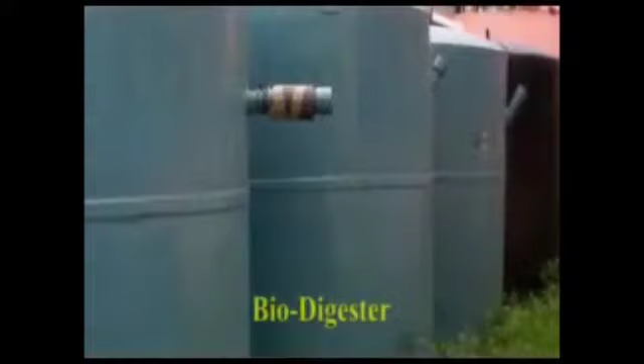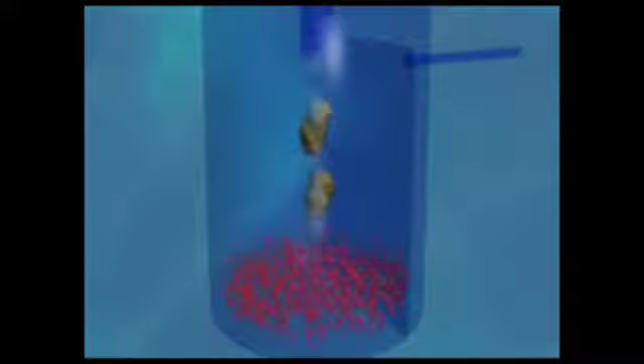DRDO, Defense Research and Development Organization: one of its many breakthrough technologies which have proved to be a revolution in the field of sanitation is biodigesters. Biodigester made of FRP or mild steel is equipped with an inlet pipe for human waste. The inoculum of anaerobic bacteria helps convert the solid waste into biogas that is let off into the atmosphere, and liquid effluent which can be drained off onto any surface and used for irrigation.

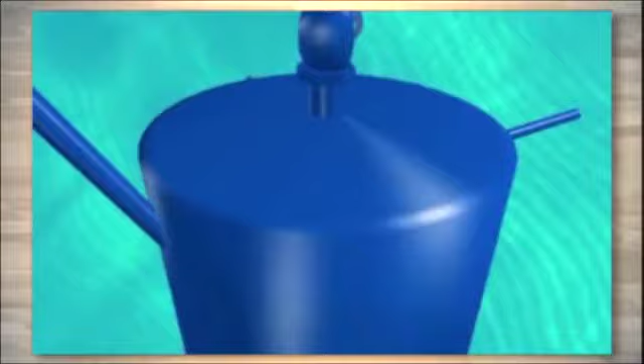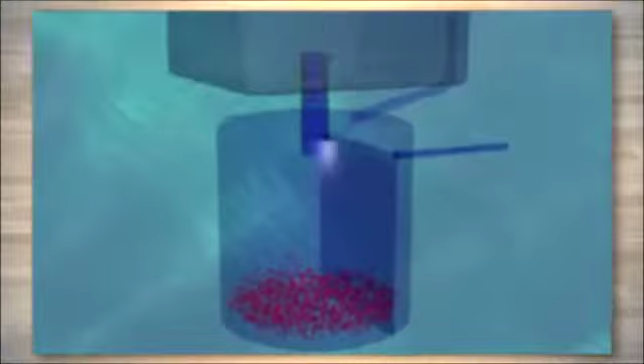This eco-friendly technology has several advantages over aerobic treatments, such as no requirement of external energy, needs low nutrient, can withstand high loading rate with very low sludge generation. Biodigesters are cylindrical or rectangular structures made up of mild steel or fiber or cement and brick construction with the provision of inlet of human waste and outlets for effluent and biogas. Fermentation tank is made of metal, FRP, and has the provision of immobilizing the bacteria in large numbers.

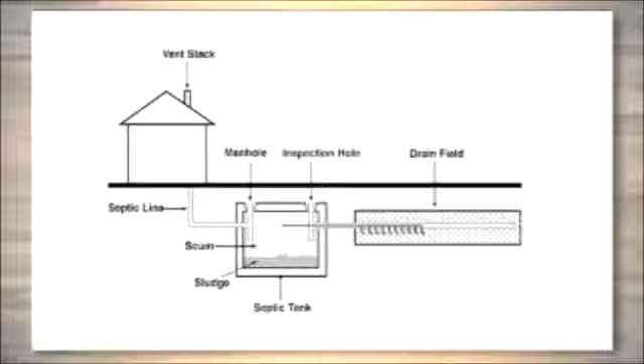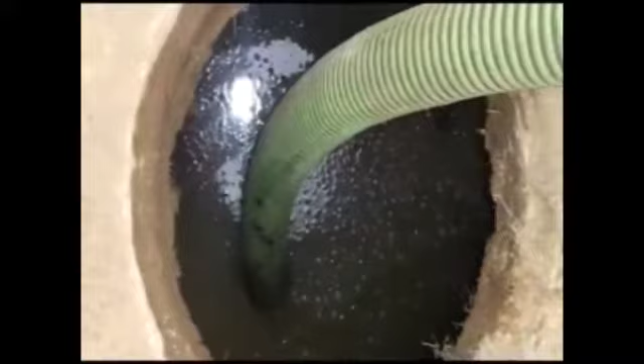Other methods used to treat human waste, such as soak pit or septic tanks, are not successful enough and need regular maintenance. Septic tank is the most acceptable technology for wastewater management where sewage systems are not available. Size of a septic tank for a small family varies from 4 to 10 cubic meters. And large volume tanks are preferred to obviate frequent cleaning of the tank. This amounts to higher initial cost and space requirements, besides the foul smell of the effluent. P-trap is provided in the toilet to prevent foul smell of the septic tank in the toilet seat.

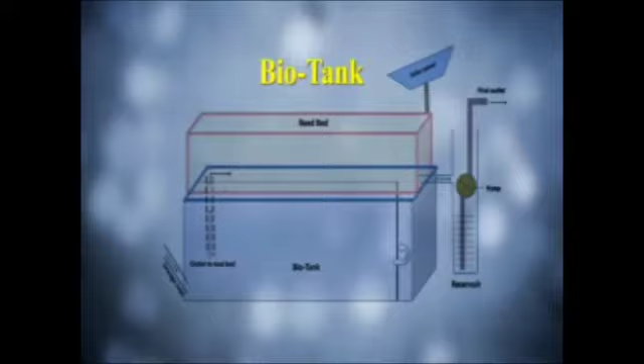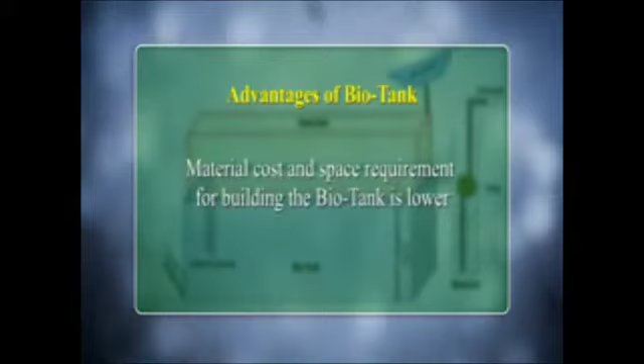To overcome the problems of conventional septic tank, DRDO has developed BioTank. The BioTank has several advantages over the conventional septic tank system. The size of the BioTank is approximately 1/3 of conventional septic tank, and hence material cost and space requirement for building the tank is lower.

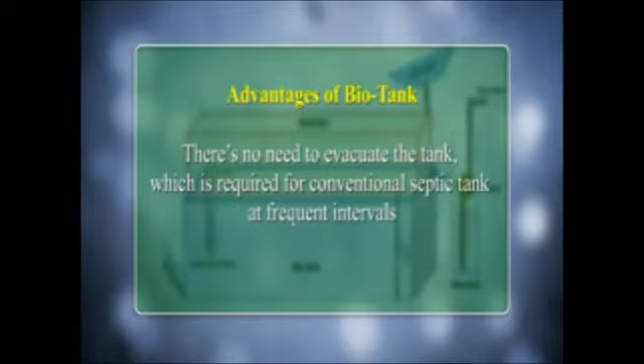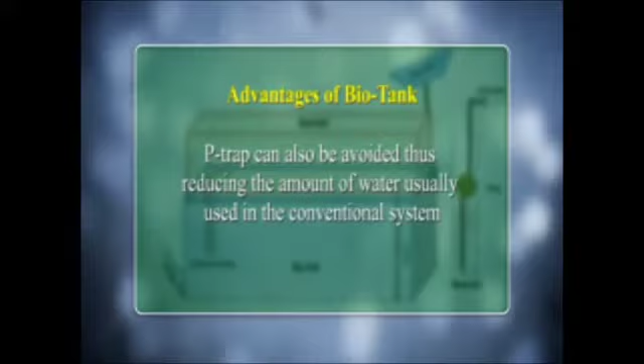There is no need to evacuate the tank, which is required for conventional septic tanks at frequent intervals. This tank requires no maintenance and very little quantity of H2S is produced as compared to a septic tank. P-trap can also be avoided, thus reducing the amount of water usually used in the conventional system.

The biotank resembles a trench dug in the ground to about 1 to 2 meters depth and connected to sewage through an inlet pipe. A trench of size 1 cubic meter is sufficient to handle waste matter generated by 4 to 10 people.

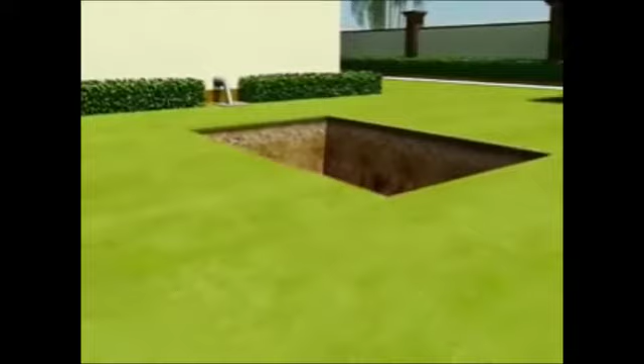The inner walls of the biotank are of cement or brick with a thickness of about 9 to 10 inches. Another wall of about 5 inches thickness is present in the center of the biotank.

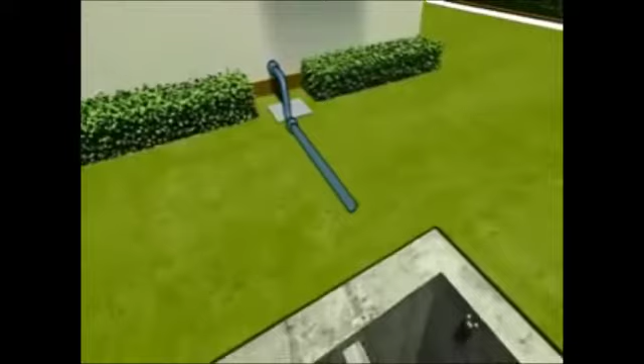An inlet pipe for the waste is present that connects the toilet to the tank. Its other end is 20 centimeters above the base of the tank. The outlet pipe for carrying the effluent is placed on the other side.

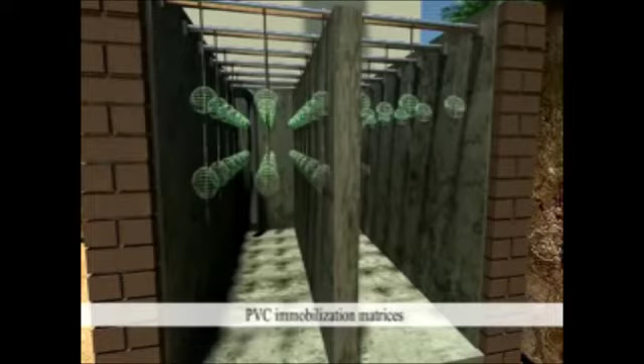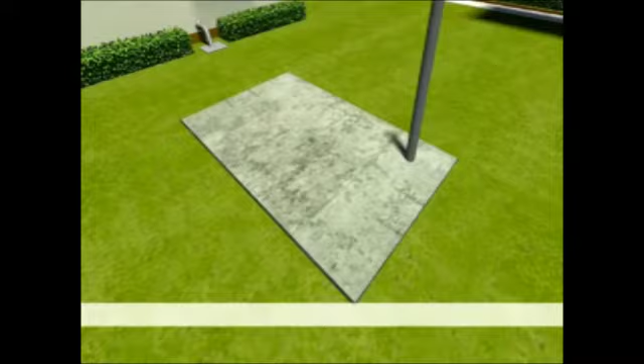Above the center wall rest several aluminium and metal rods running parallel, and suspended from these rods are the PVC immobilization matrices that act as bacterial reservoirs, entrapping the bacteria after the first seed inoculum is introduced. The first seed inoculum of anaerobic bacteria is now introduced into the tank.

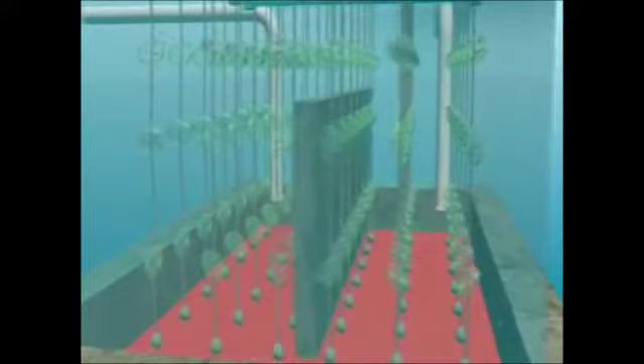These matrices act as the bacterial attachment sites within the tank and ensure the bacterial population in the biotank is always maintained at the optimum level despite changes in pH and excessive flushing. Routine and popular toilet cleaning agents can also be employed without affecting the bacterial population.

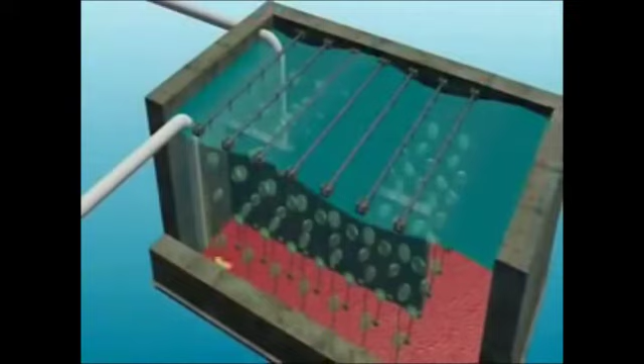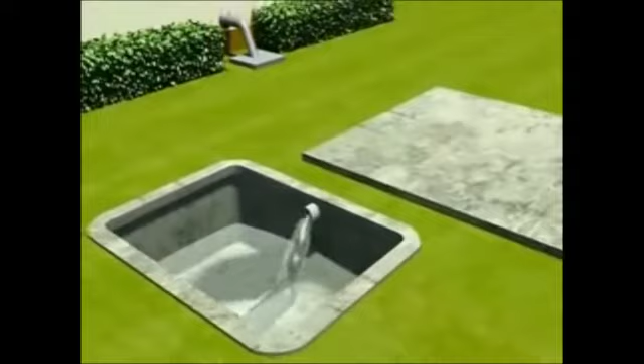Sewage enters the biotank through the inlet pipe. It then passes over the consortium of anaerobic bacteria that break it down into gas and effluent. The treated effluent comes out through the outlet pipe and can be used as such for gardening purposes or can be treated further by passing it over the reed bed system. Biodigesters have an edge over other methods because of the following properties.

It is very effective and eco-friendly, causes no groundwater pollution, no electrical power or chemical is required, 100% conversion of human waste into water and gas, that is, carbon dioxide and methane. It is odor-free. Pathogen reduction up to 99%. No sedimentation, hence no evacuation required for lifetime.

Manual scavenging is totally eliminated by this process. No need of conventional sewage system. It is affordable and maintenance-free. Water can be used for gardening and gas for heating purposes. Requires one-time bacteria charging. Organic waste reduction up to 99%. Suitable for any geoclimatic condition. Bacteria can withstand toilet cleaning agents.

Biodigesters can be easily customized with respect to geographical conditions, number of users, mobile or stationary applications, and the economic condition of the user. Apart from this, low-cost single-house biodigesters have also been designed for the rural sector of the country, which are long-lasting, require little space, generate environment-friendly, safe effluent, and do not require any maintenance.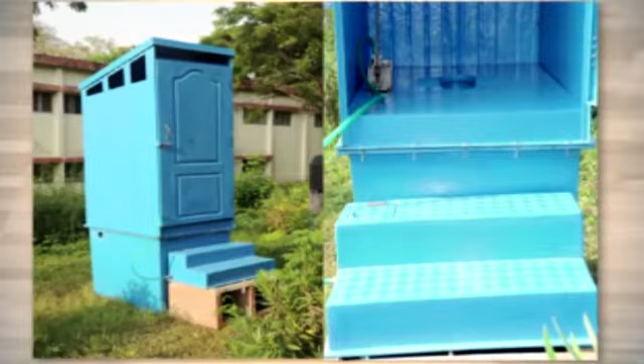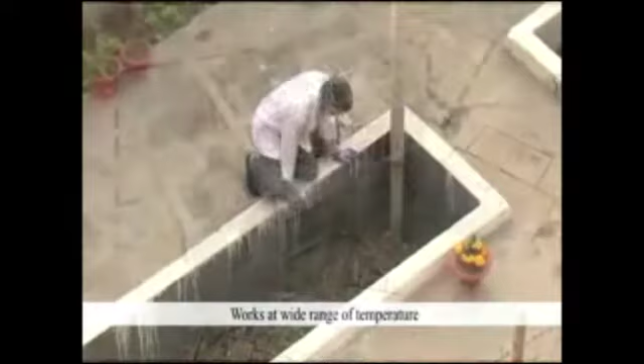Biotanks can be of different sizes, either for a single house or multi-storied complexes. The technology works at a wide range of temperature. If a large number of toilets are connected, sufficient biogas can be generated, which can be used as an alternative energy source. Its wide applicability, ease of construction, simplicity of design, zero maintenance, and excellent eco-friendly effluent quality make BioTank an attractive alternative.

These bio-toilets can contribute significantly to the nationwide cleanliness campaign, Swachh Bharat Abhiyan, launched by our Honorable Prime Minister, Mr. Narendra Modi. Let us all together work for a greener, cleaner and better India.